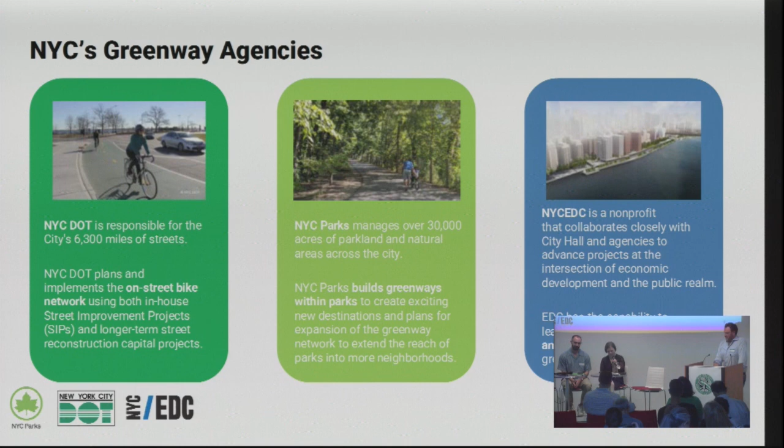Introductions, we already did this, but I'm Ted Wright. I run the bicycle program and have been involved in greenways for years. NYC Parks is represented by... Hi everybody, Mitchel Loring, I'm a project administrator in the Environment and Planning Division at Parks. And Lena Ferguson, Assistant Vice President at EDC in our Neighborhood Strategies Department.

This is the first big thing that I have to present today. It's not done, but the last time we had this summit, we talked about the citywide greenway study. And there was a lot of numbers being thrown around. I think it was 400 miles at the time of greenways.

And what we're looking at now and what you're seeing is us basically organizing all of these segments that exist already in some shape or form and have put them into a database, and this is it graphically represented. This may not seem like a lot to a lot of people, and it might not be at this point, but this is the background from which now New York City DOT is going to be presenting a gap study. We're going to be looking at all those major gaps over the future, and that's what's going to be exciting. But this stuff, to me, as a planner, this is really exciting.

All of a sudden, you start to see that Parks has a lot of land out there. A lot of those are, over time, developed - Shore Parkway would be an example of one that some people don't even realize is Parks. DOT has a lot of on-street stuff that we call greenways. Then there's some various other folks.

Not going to go into it too much, but another really key thing that we've been able to do is come up with a naming system here for greenways. That's really key. If anybody's been using these things, like the question that Brian was just asking, you've been out there, you've seen signs - I've seen some crazy signs, and they are legacy signs from years. So now what we're starting to do is pull this together, call it a greenway system, and begin to build off of that.

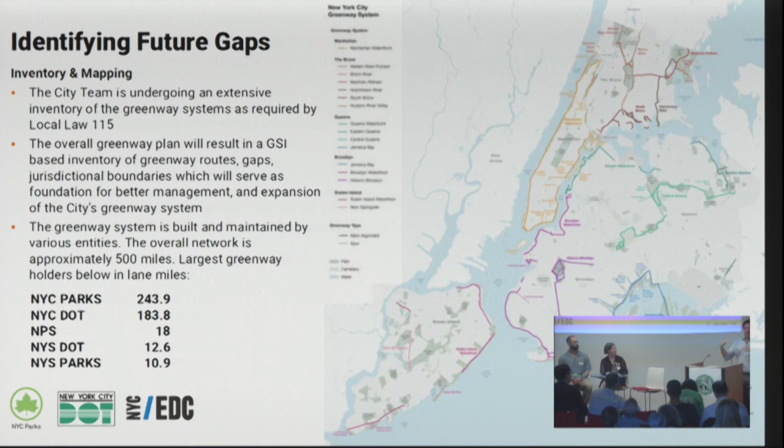So this is a great platform that we will be sharing a lot more of. Ultimately, we're going to be putting it online for all of you to see and for policymakers to use, but it's very exciting. Some of the big things, high level: we have $7.25 million, an unprecedented amount of money to look at planning studies. We are going to be focusing on underserved communities. We're going to be talking about that, and you'll see some of DOT's work specifically, and then the other groups will talk about theirs as well.

Another exciting thing coming up, and this will take some time, is the citywide cyclist micromobility model. This is really exciting because we'll be able to look at routes and see how many people will use them in the future if we build them. Greenway is one thing, bike routes are completely different, and we have to start modeling these based on bicycles, not cars like we've been doing for years.

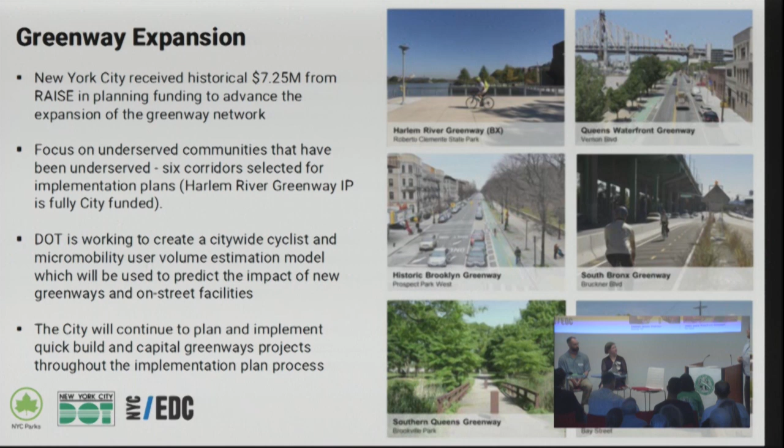Moving on, this is something EDC is doing, and it's very helpful to the process. They're going to be looking at feasibility studies and what things can be built out best, and what kind of money and resources we need to commit to certain projects.

That's really key. We're going through a bunch of things that Lena will talk about, but it complements what you're hearing from me — we're creating base level data and information, then working on these plans. The next level is how do we spend the money, how do we dedicate the resources. Part of that is where people are going to ride, but there's a whole host of other things.

Kind of exactly what you guys were just talking about, what Andrew was just talking about — all these investments in the city. How are we going to spend these on greenways and make the biggest difference in the communities around them?

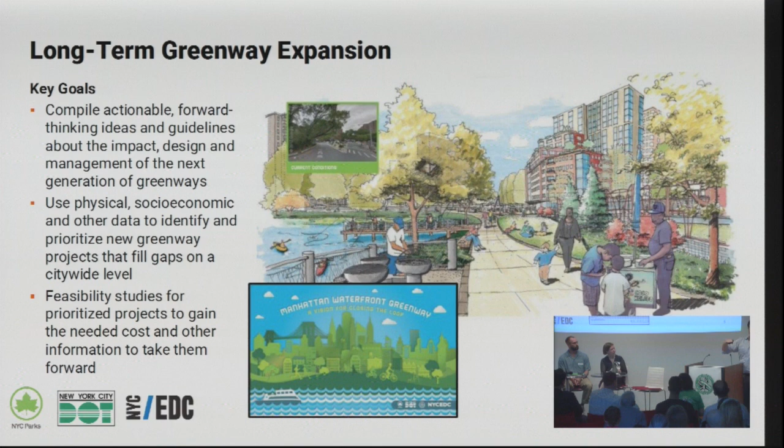Now, our implementation plan — something I'm really proud of. Margot is here somewhere, she's been working hard on this. Also Emma and Tim are valuable members of my team out here working with communities and trying to get maps on the ground and actually defining new routes.

These are the routes we talked about. We've already started the Bronx Harlem River Greenway — we're going to have an actual route that we're going to start pouring money into and building more investment. We're also doing some stuff right now on that.

Queens Waterfront Greenway — Emma and Tim are running that. Emma, could you raise your hand for a second?

Really, really exciting. Biketober is around the bend, people, so get pumped.

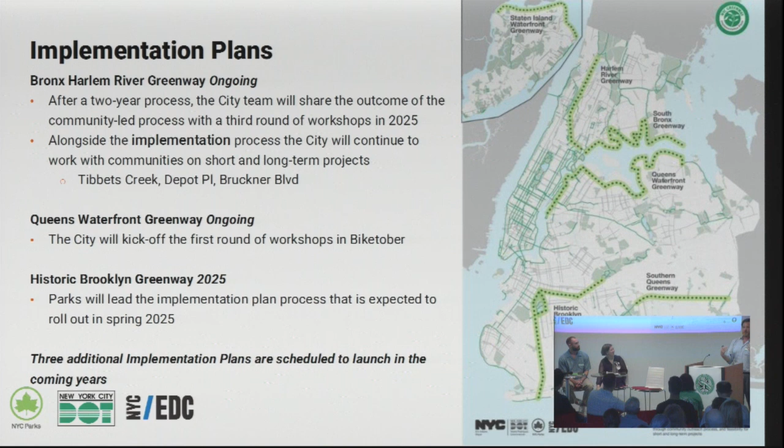All right, historic Brooklyn Greenway is also coming. That's the first Parks-led one, but that's also going to be coming out in the next round. So it's going to take time — can't be built every day, but it's very exciting to talk about.

With that, I'll pass it over to my colleague.

Thanks, Ted. So all that planning work Ted was just talking about might sound like a lot of planning and not a lot of building, but I want to remind everybody that these greenway projects require substantial coordination because of their long, linear nature. They cross multiple political and agency jurisdictions, as well as physical obstacles along the way. It's no small task to alter a dozen or so miles across neighborhoods in one of the most densely developed cities in the world. But New York City is on a bit of a roll right now, having success going from planning, funding allocation, and designing to building projects.

Just two years ago at this summit, the first one, Parks had recently completed our Destination Greenways plans for Brooklyn and Queens. At the summit, we had just recently released the plans. The Adams administration decided to come right out of the gate and fund six of those initial projects to jumpstart this process, which was great news at the time. Since then, four more additional projects from these planning studies have been funded, which really shows that these thorough planning processes can help make the case for these big transformational infrastructure investments in our neighborhoods.

So thus far, the Adams administration and the City Council have already allocated over $70 million to the projects from these plans and Destination Greenways for Brooklyn and Queens. Parks and DOT are now hard at work trying to make these plans become a reality with that money.

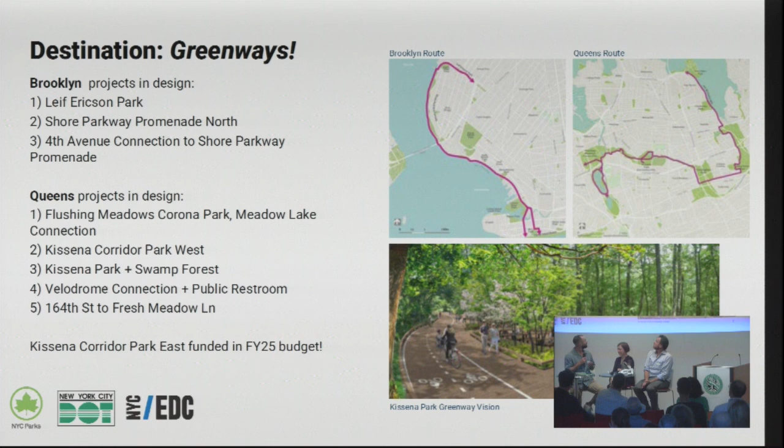While the infrastructure investments coming out of these implementation plans are impressive, it's also really exciting that agencies are able to quickly implement some improvements through in-house resources. DOT's Street Improvement Projects program is one of these options.

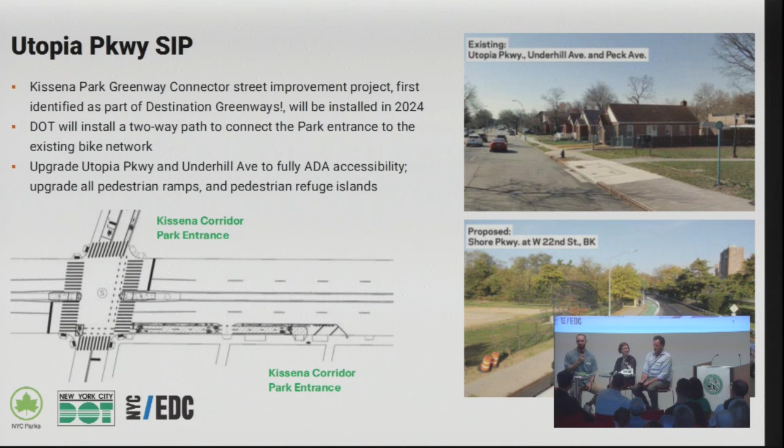Soon we'll all be able to go ride safer on this little section, and people will see the Greenway out there. All those people driving by, all of a sudden they're going to make that connection.

Some of our implementation plans are yielding results even before they're complete. When Parks needed to close Rainey Park for a reconstruction project that would temporarily close the portion of the Greenway on the Queens waterfront route that's in the park, DOT saw this as an opportunity to fill in a gap in the Vernon Boulevard bike lanes, a key missing link in the Queens Waterfront Greenway plan.

Once the park reconstruction project is done, hopefully next month, with these new on-street bike lanes, we'll have a great parallel route condition with an in-park greenway right next to an on-street greenway. This is a big improvement for these corridors and helps accommodate the many diverse greenway users we have, whether out for a recreational outing, pushing a stroller, on a jog, or seriously commuting to work.

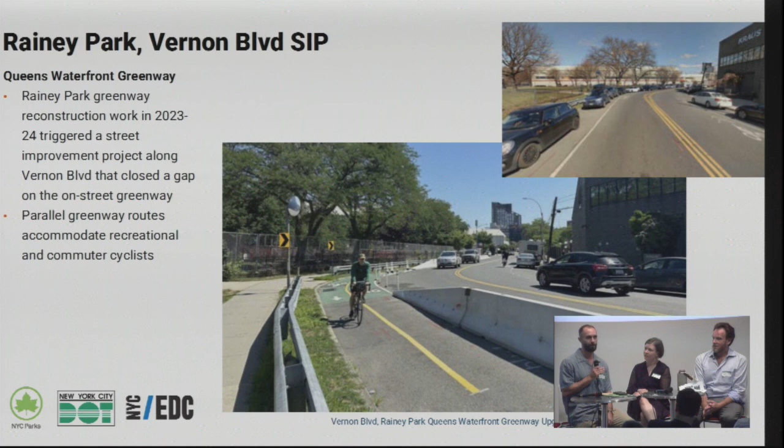These parallel routes are great for that, and also provide redundancy in case of future temporary street or park closures. So the city team will be looking for other opportunities to find these quick-win street improvement project processes throughout the geographies we'll be studying in the implementation plans. That way we can keep making steady incremental progress sooner than the full capital project process takes, and keep building out the network we all want to see in the city.

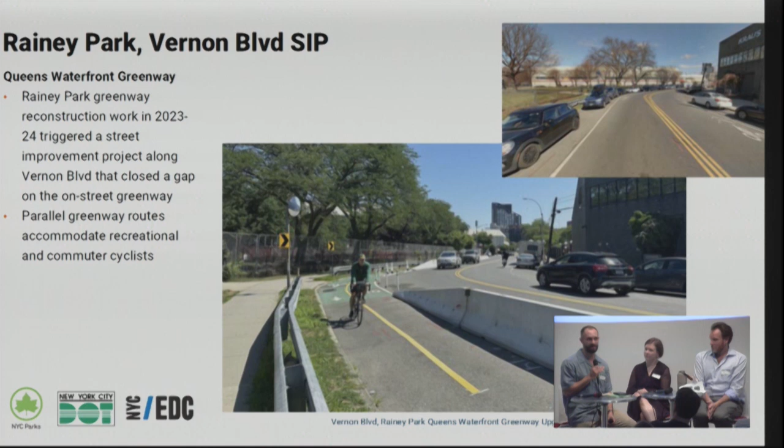So with that, I'm going to turn it over to Lena to talk about progress we've been making in Manhattan. Thanks, Mitchell. I don't have a beautiful flyover of the New York City Harbor to share, but I do have the pleasure of talking about the Manhattan Waterfront Greenway, which I think is just as good.

As I'm sure most of you know well, the vision for Manhattan Waterfront Greenway has a decades-long history of advocacy, including by plenty of you in this room, and of planning. It was first mentioned in 1993, followed up in the Bloomberg administration in 2004, and now we're doing the thing. To date, 85% of the loop is complete. We're working together, our three agencies, to close that remaining 15%. In 2018, we jointly released a plan for those remaining gaps, which is the map you see here.

Throughout the years for Manhattan Waterfront Greenway, we've done a lot of community engagement, used SIPs like the ones Mitchell mentioned to build momentum, and have built and are building capital projects as funding becomes available and as the time becomes right. I'm going to highlight four of those exciting capital projects along the east side, projects that EDC leads design and construction for on behalf of the city, working in close collaboration with these fine folks here.

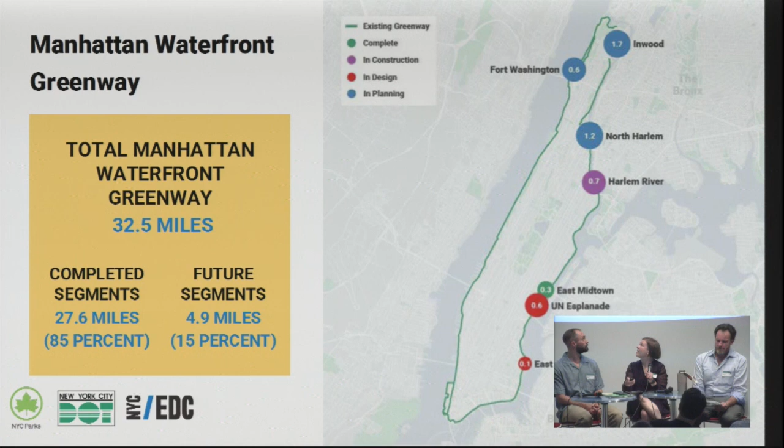First, East Midtown. You all know the East Midtown Greenway segment from 53rd to 61st, which just opened in December. As you also know well, there's no waterfront land in this location because of the FDR's location, so to achieve a waterfront greenway, we built this 0.3-mile project outboard in the water. It has separated bike and pedestrian paths, each about 20 feet wide, a planting area, a pedestrian bridge over the FDR, and public art to raise awareness about the ecology of the East River.

Immediately south, as Andrew mentioned, we're currently designing the UN Esplanade portion, which will be double the length of this one. It will connect directly to the end of the East Midtown Greenway at 53rd Street and extend that outboard greenway all the way to 41st, where it will link up directly with New Wave Pier. We're expecting construction of that project to start in 2026.

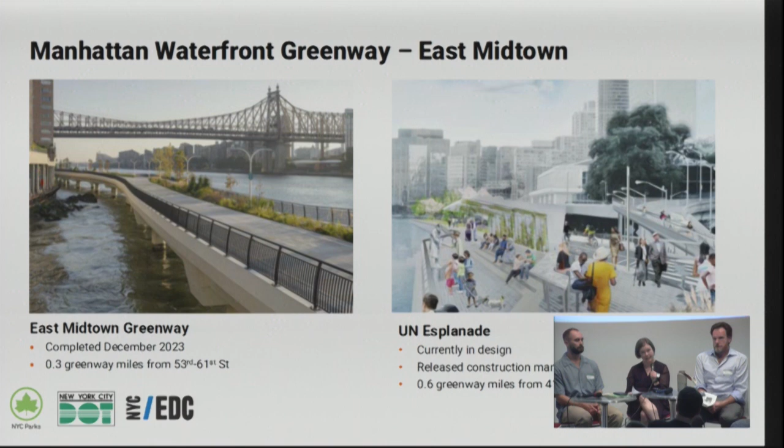And then I'll move upriver to a couple of our projects that are in exciting stages in Harlem. The first is Manhattan Greenway Harlem River, a 7-acre waterfront park that includes a 0.7-mile greenway connection built on previously underutilized waterfront land between 125th and 132nd Streets. In addition to the greenway, the park will also include adult fitness areas, multiple lawns, overlooks, seating areas, public artwork, a playground, and a grilling area.

It's really going to be an amazing multi-use asset for this community. We're anticipating breaking ground and beginning construction later this year. Alongside projects to fill remaining gaps, the last project I want to mention is one we're doing to improve existing portions of the Manhattan Waterfront Greenway. We're currently designing the reconstruction of a section over a mile long, called Bobby Wagner Walk, from the 90s to the 120s, and reconstructing the 107th Street Pier.

A lot of this area, the pier itself, is currently closed because of its condition, and a lot of the area is inaccessible. We're really excited to reopen it for the community. The reconstruction includes raising the greenway to account for sea level rise, incorporating seating areas, overlooks, adult fitness areas again, child play areas, picnic tables, shade, public art—everything that'll make this a great space. We anticipate construction to start next year on this one.

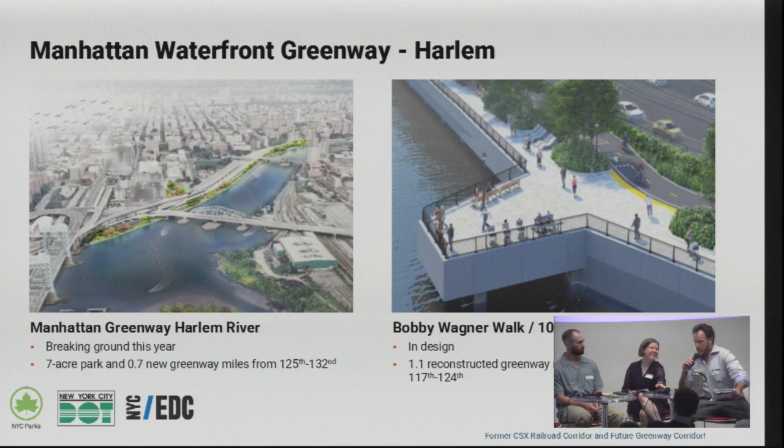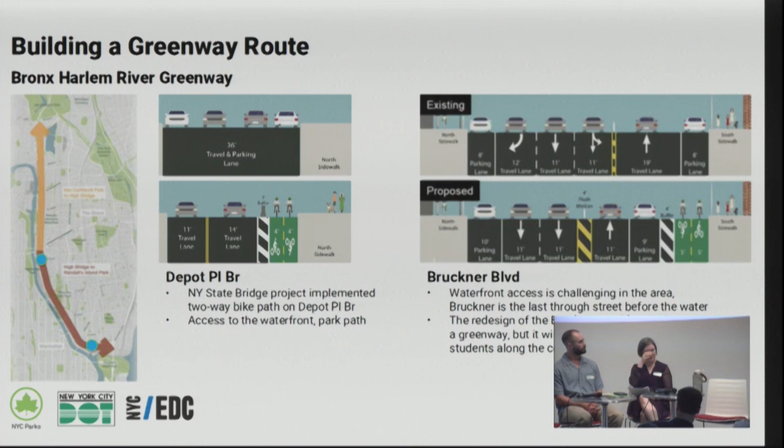So now I think it's kind of apt, looking at a lot of the people I know from back in the day when we were advocating for the Manhattan Waterfront Greenway, and specifically the portions out in the UN area. That takes time, and it's about gauging time—it's about how do you keep interest over time. And that's really where I think all of us are definitely on the same page here.

We all approach it differently. Lena just talked about coming to fruition with these huge, massive projects that cost a ton of money and a lot of permitting. Mitchell's talking about all these parks that are hard to change—there's different issues with parks. But one of the things we've been doing a lot, and coming back to where we are right now, is developing new planning networks. So instead of looking at these as all little pieces, we're looking at larger pieces. How can we connect all these segments? How do they go from just one small project to a larger connection that connects more people, that's more useful?

We're talking about—there's a walking advocate shirt that I'm assuming is what City Saunter is. I'm literally thinking, I'm very much on the bike side, but there's a lot of people out there that just want to walk along their waterfront. That's an advocacy aspect that we need to capture. I think that's one thing we're all working together on.

So enough spouting here, and I'll talk about one of the things you're seeing in the Bronx River, Harlem River Greenway.

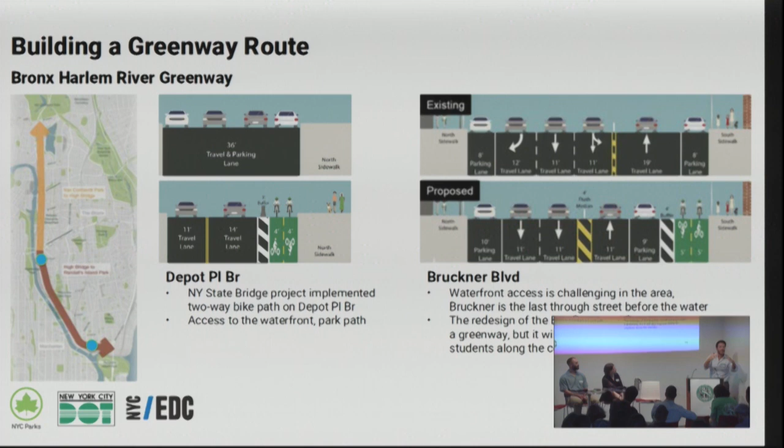Another thing that we're doing is Bruckner Boulevard. A daunting task, but what we're doing is capitalizing on a school that's on the western side of Bruckner Boulevard, and they want some traffic calming. So what we're going to do is incorporate the Greenway into that, and put a two-way path along Bruckner Boulevard.

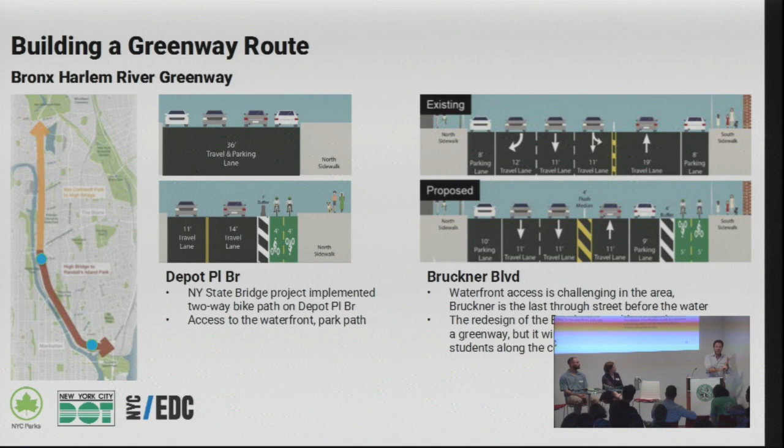That's not the ideal. Yes, we want it over the waterfront, but we're building momentum, just like we did when we built 1st and 2nd Avenue in Manhattan, laying the groundwork that we can build off of in the future. And then, a couple outside of the Bronx, the Harlem River Greenway.

The Bronx River Alliance shirt, whoever's wearing that threw me off earlier today.

All right, so these are various projects that we've been doing that are adding to the network and making it more usable. Sutton Place, maybe some of you haven't seen it. We've all been looking at these large - I love that greenway out there at the UN section. It's wonderful, but people need to know it's there. And more people who see it, more people who access it, more people who think of it as a transportation resource is overall very good for the Greenway Coalition.

Waters Place, I have to admit, I have been on the Hutchinson Greenway up here, but I have never been to Waters Place. This is kind of in the cuts, but it's very important to make a connection from this part of the Hutchinson Greenway, which is fairly isolated, and doesn't have the large advocacy group that we see around the Manhattan waterfront, but is still important. What DOT is doing is putting a two-way path along the side of a road that is kind of nondescript - it's got some elevated trains over it and such. It's not a great place to be, but we're making that connection, and hopefully people will start to see the Hutchinson Greenway as something more than on the side of the Hutchinson Parkway.

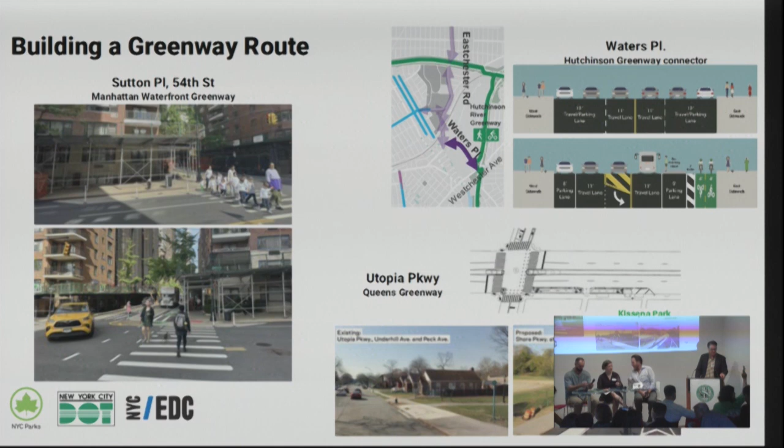Lena, if you don't mind, I'm going to go back to this slide that you had here. I was just wondering, because a lot of the projects that are in the pipeline are in one of these stages - they're in planning, they're in design, they're in construction. It's not always evident to a bystander what stage they're in or what exactly that means. I'm wondering if there's a 45, 60-second explanation as to what each of those three steps mean.

Planning means that we don't have a design team on board yet. As you know, the East River is right where Harlem River Drive and FDR is on the East River. Getting to creative solutions like we did for East Midtown, and what we're designing now for UN Esplanade, is a long process that takes planning, permitting work, setting the stage so that when we get it far enough, we can bring on a design team and it can go. It often takes years of that sort of work to get a project in place so that we can use our design and construction experts in New York City to get a project done as soon as possible. That's why they tend to stay in that place for a while - it's because we're getting them ready to go as soon as possible. And then design means just that.

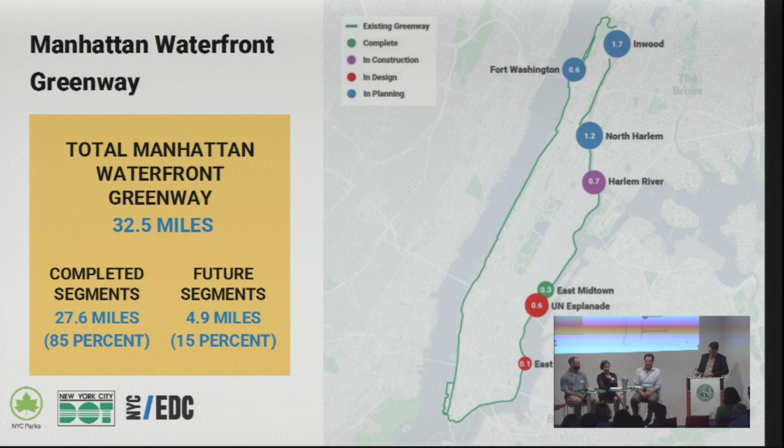I think first, the best thing we can do is make the construction of these projects as quick as possible so we can get people out on beautiful new facilities that are as safe and separated, that gold standard level of safety you were talking about. I think this is why redundancy is so important, and why we've been working to not just build those waterfront facilities, but for bikers, build a strong network of bike lanes on streets interior to the waterfront.

So that we don't have to scramble and try to build out temporary bike lanes, walkways, et cetera. If we have them already there, it allows people to be able to use them easily and already know what they are and where they are before those big construction projects begin.

We do have standards at New York City DOT. You should always bring them up to us if there's particular issues. I will say it's always a constant battle, though, for those of you in the construction industry, for the large amounts of equipment that need to be brought into the city. Same thing happens on roads. It's a bummer when it happens to bikes and peds, because oftentimes that puts them in danger.

So please let us know and advocate. If you guys see something that's wrong, please put in a 311 request. We'll get to it in 3 years. Just kidding. No, don't, that was a total joke. 3, 4. All right, 4.

No, honestly, it does get elevated really quickly. If it's a safety issue, we actually have people who are out there who will go out and check on it. And that is something we do throughout the city.